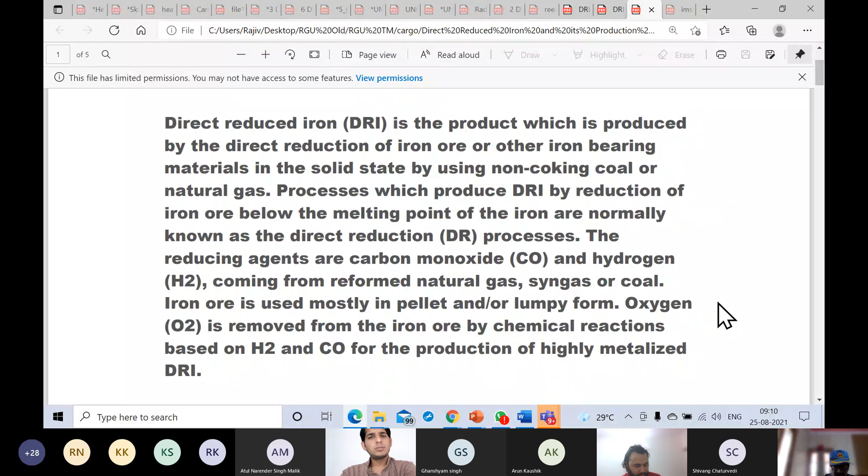So oxygen is removed from the iron ore by chemical reactions, and then you have a production of highly metalized DRI. Direct reduction process is there. Solid metallic iron, Fe, the chemical symbol, is obtained directly from solid iron ore without subjecting the ore to metal or the metal to fusion. So it is not melted. It is done by a direct reduction process without melting the product, melting the iron itself.

So in the solid state when reduction is happening, it is to remove the oxygen and allow reduction of iron oxides also. Some other oxides may be present apart from iron ore. You may have MnO, magnesium oxide, silicon oxide, etc. All this are refined, I can use the word refined because we are interested in the end product, which is reduced iron ore. So all these have got iron oxides which are reduced, or oxygen is removed from them, and that is why it is called reduction process.

But they are done at a low thermodynamic activity below the melting point, so they are not fused. It is done in the solid state itself.

Just as a background, I thought you may be interested in how DRI is formed. Now, DRI is porous by structure because oxygen has been removed from it, so it will leave some gaps inside the structure of the iron, and that will cause porous structure.

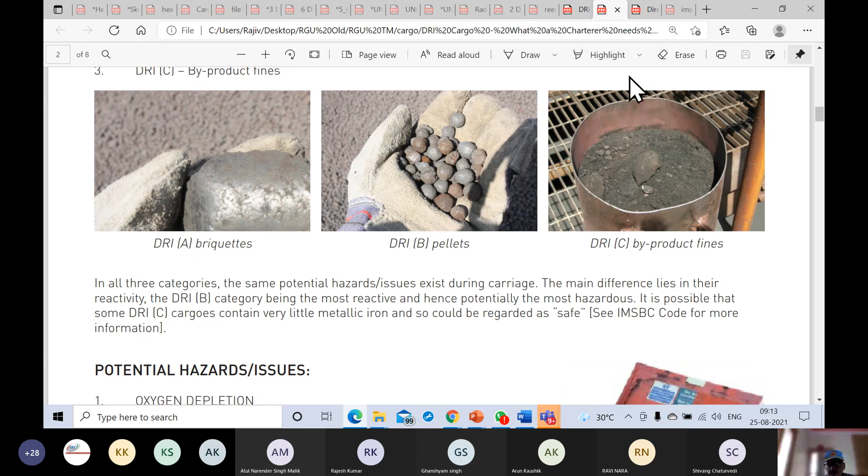Okay, go back. So what is happening is that the metallic form of the iron which is being reduced contains two elements or two metallic forms. One is iron and the other one is Fe with oxygen, iron with oxygen. So this residual form of iron with oxygen is the one of concern, to get the oxygen out of it using chemical reactions. The total iron is a sum of these two.

So the conversion of iron oxides into metallic iron, using maybe carbon as cementite or oxygen removal, is the process of reduction of iron to form DRI, which can be in pellets, solid lumps, or maybe fine byproduct like powder.

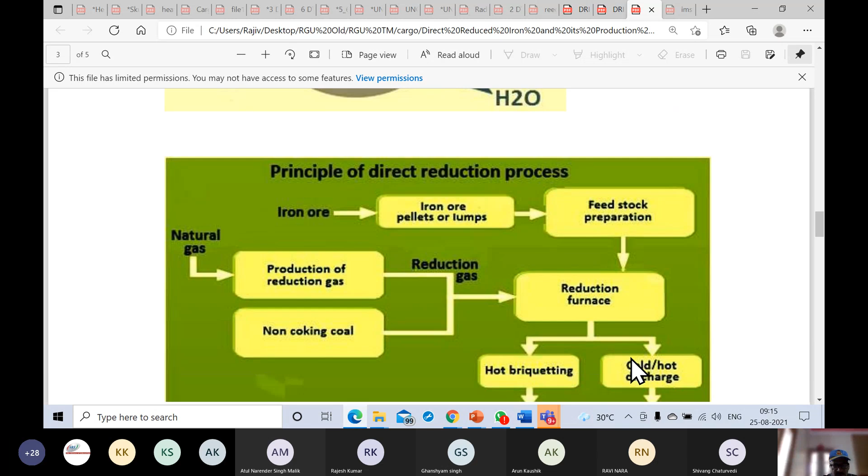This is how it goes. Better is this one. Direct reduction process. This is the flow chart.

Iron ore is being fed like pellets or lumps into the preparation part, or feedstock preparation, or the raw material preparation, if it can be called that. Iron ore in form of pellets or lumps is being fed into the feedstock or the ore preparation. Then it goes to the reduction furnace.

Reduction furnace, you have natural gas coming in, and this is going into the reduction furnace. Natural gas could be, for example, a byproduct from a furnace or from a refinery, and it's being used here to cause this reduction. Also, you can have non-coking coal as a material or element to do this process, either by natural gas or by non-coking coal.

Then this is fed into the reduction furnace. Of course, the reduction furnace will have input from the natural gas, non-coking coal, and also from the raw material, which is called the iron ore, also coming here. Now it is getting reduced, and it leads to production of either hot briquetting or cold/hot discharge. The end result, if hot briquetting, results in HBI, and direct reduced iron is part of cold/hot discharge. You have the end product as a material which has no oxygen, or oxygen has been removed from it. That is why it is called reduced, because the oxygen level has been removed from it.

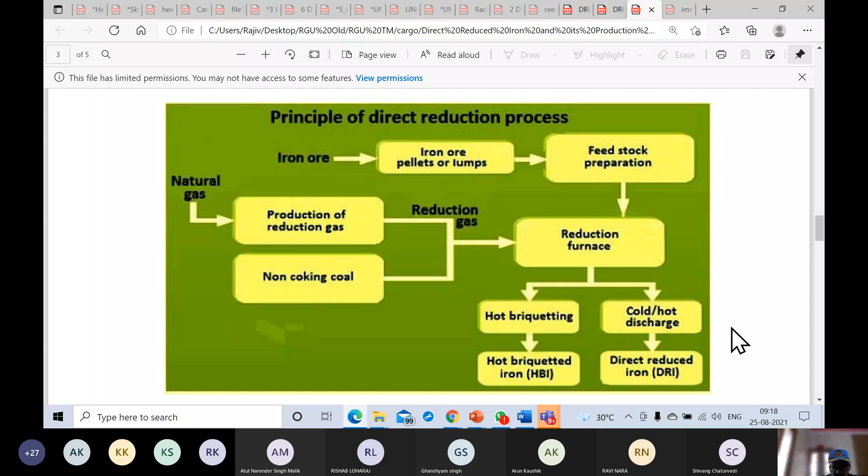So this was just to give you an idea how the DRI is done. Now see, chemical reactions, production, etc. is not really our purview of the subject, but no harm in having a look.

Reduction processes or reactions go like this, a review of 12th standard chemistry. C plus O2 is CO2, CO2 plus C is 2CO, carbon monoxide. 3 Fe2O3 plus CO results in 2 Fe3O4 plus CO2. And of course CO2 you remove, but this goes further on to come back: FeO plus CO. Carbon monoxide has been introduced in the iron oxide for reduction, and the product is iron plus CO2. So oxygen has been removed and this is the direct reduction product.

Now here, this is what is called DRI, directly reduced iron. It is not having any oxygen component. CO2 is released and maybe not used at all, and this is the end product, direct reduced iron without oxygen.

Then of course there will be further cooling done to get the end product cooled down, which may be an external water cooling system. Then the product is discharged from the kiln and screened and magnetically separated. DRI has got a content of iron; this gets magnetically attracted and clings to the separator.

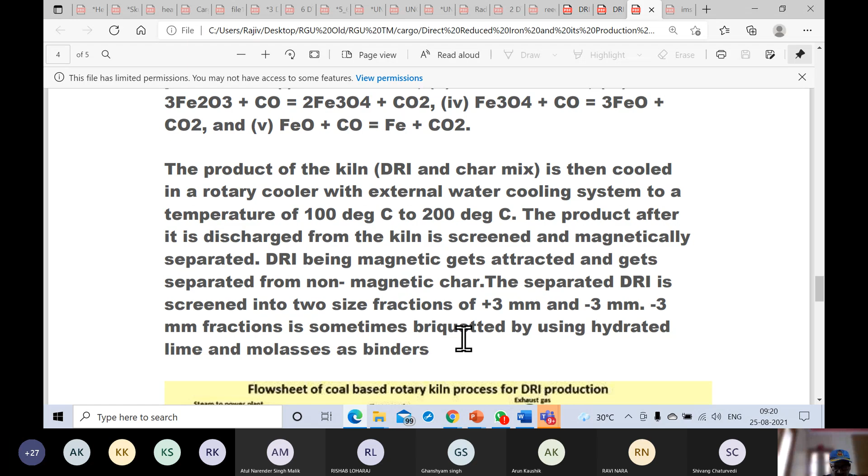Then the separated DRI is screened into two size fractions depending on the requirement and the kiln layout. It may be separated into size fractions, maybe plus 3 mm and minus 3 mm. So these are the products, and you get iron which has no oxygen, called direct reduced iron.

This is something to use coal; not really important, but just remember coal is also used to directly reduce.

Please remember, really speaking, how DRI is produced has never been asked in a paper. But I included this because I felt you might be interested to have a look at how it is done. This has not been a subject of MMD paper or question paper, but I included it only because I thought candidates might be interested to at least get some idea how DRI is made.

As I said, the questions which are going to figure, or have figured, are the precautions and hazards for the product to be carried on board, which we are going to have a look at now. After we finish with this, we move on to the precautions and hazards.

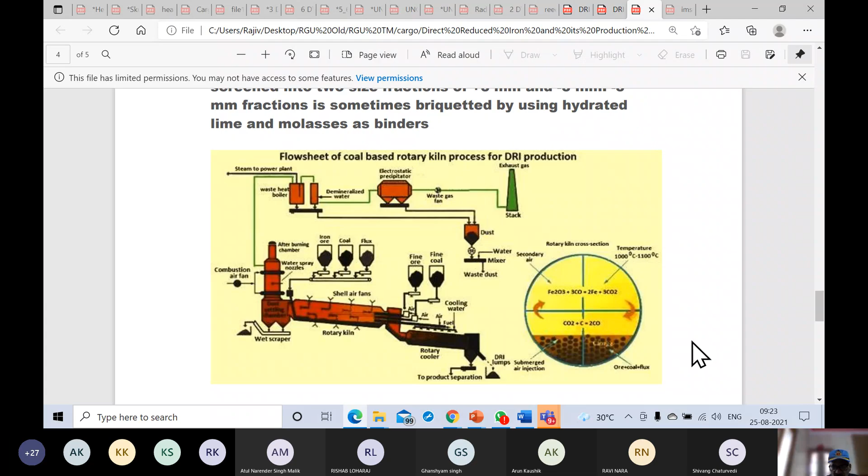So, what is the advantage of DRI to be used? This is used in scrap during steel making, as metallic residuals in scrap. So it is used as a product to be included for steel making. It is a manufactured product of uniform composition, uniform size, and low sulfur and phosphorus content as compared to scrap. This is an advantage if you want to use it for steel production, since it has low sulfur and phosphorus content.

It is possible that it is used in a blast furnace, and then it improves the productivity of the blast furnace.

Okay, so having had a look at the production part, let us move on to the precautions, etc. I think this is where we stopped yesterday. Weather precautions.

One very important factor is that this cargo has to be kept dry. Moisture is not supposed to interact with the cargo at all. Open storage may be acceptable, but if it is to be loaded into ships or transferred between ships, precipitation should be avoided. All non-working hatches of the cargo spaces into which this cargo is loaded are to be kept closed. This is an important point that has to be mentioned in your answer regarding weather precautions for any non-working hatches of the cargo spaces.

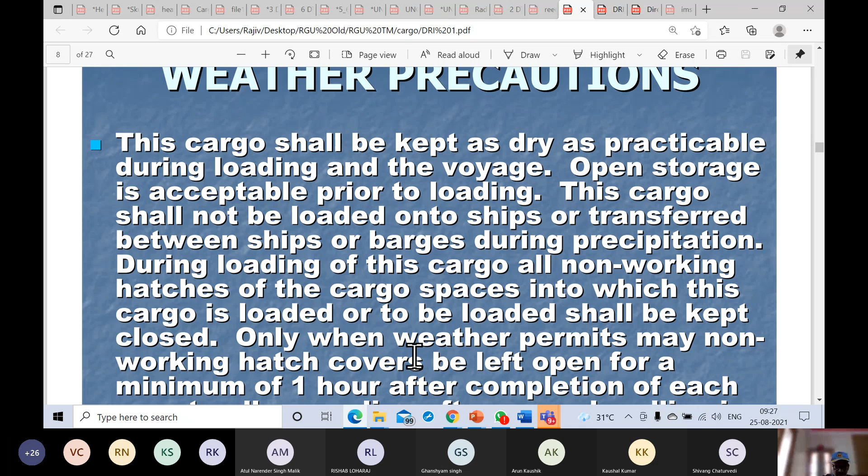So that is one precaution which has to be mentioned in your answer if you are answering the points to be precautions to be exercised while handling DRI cargo - weather precaution.

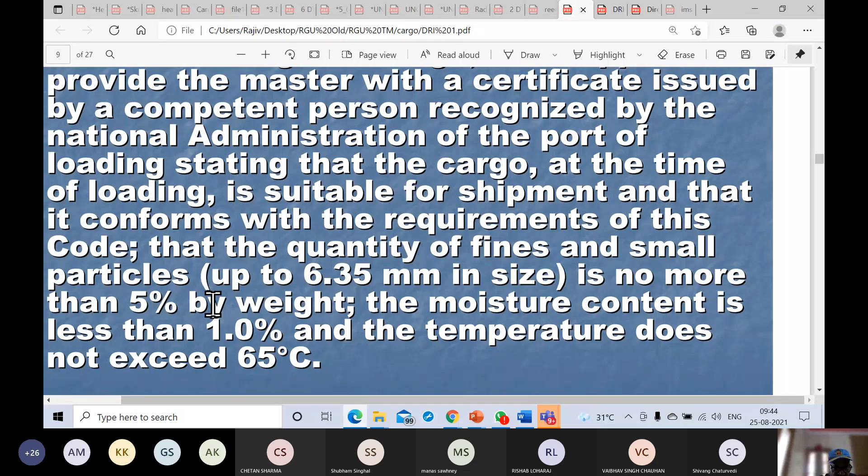तीन चीजें शिपर ने डिक्लेयर करनी है, हमने दो ही देखी है. One, fines and small particles are less than 5% by weight, moisture content is less than 1%, and temperature of the cargo is not exceeding 65 degrees Celsius. ये तीनों चीजें डिक्लेयर होंगी from the shipper. This has to come from the shipper declaration because this causes concern. So, quantity of fines and small particles should not be more than 5%, moisture content should be less than 1%, and temperature of the cargo is not exceeding 65 degrees Celsius. ये तीनों precautions हो गई from MSDS.

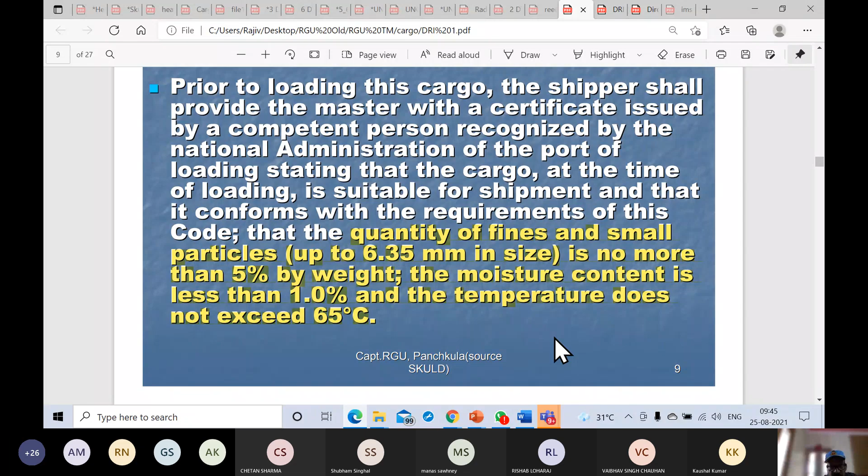ठीक है जी, we go on. Then, to move on, loading. This cargo shall not be loaded when the temperature monitored is in excess of 65 degrees Celsius, which is requirement. If the temperature of the cargo to be loaded is more than this, it cannot be loaded. Or if the moisture content is in excess of 1%, or if the quantity of fines and small particles exceed 5% by weight, then the cargo cannot be loaded.

अच्छा, एक बात बताएं, while we were talking about PSC, let me assure you that if you are loading bulk cargo, especially because we are taking a topic on DRI which is going to be loaded in bulk, then if PSC happens to visit your ship, the first thing they're definitely going to ask you is where is the MSDS? They want to see the MSDS. Let me assure you, if you cannot produce approved MSDS from the shipper, your ship can be detained. Then there is a breach of the PSC. You have to produce a MSDS.

अगर आपके पास नहीं है, you see, I'm giving you a guideline because you're going to be chief officer on any foreign going ship. So if in case you land up on a bulk carrier, and you've never done a bulk carrier, you have worked on tankers only, please remember, if you're loading bulk cargo, you need a MSDS from the shipper. If not, then you have to insist upon it. So much so that on non-production of MSDS from the shipper, you can actually stop loading. Otherwise, just in case PSC inspection शुरू हो जाता है, your ship can be detained.

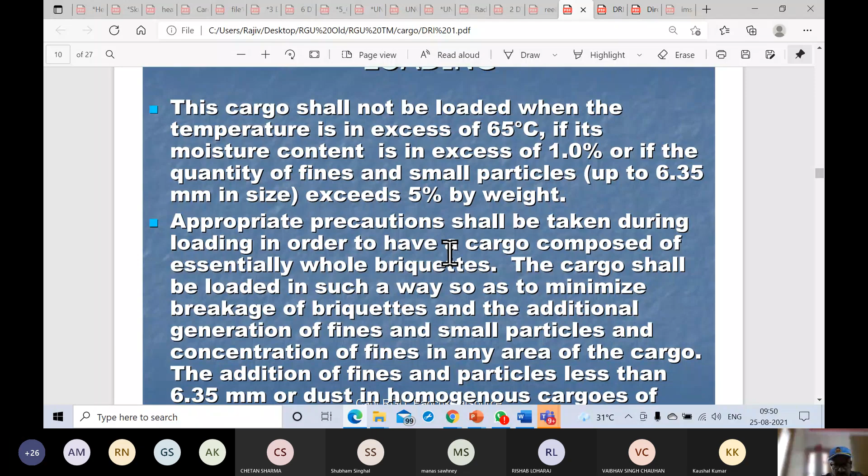Okay, now, so cargo should be composed essentially of whole briquettes, means precaution should be taken. But if it is not that, then it should be loaded in such a way that dropping of the cargo from a height is minimized to avoid breakage of briquettes and generation of additional fines, because fines cannot exceed 5% by weight. So do not drop the cargo is also recommended by MSDS. Do not drop the cargo from a height in such a situation where you can generate fines.

It is prohibited. It is prohibited to generate dust and fines, particles which are less than 6.35 mm. So briquettes should be carefully loaded, dropped into the cargo space so that additional generation of fines and particles does not take place.

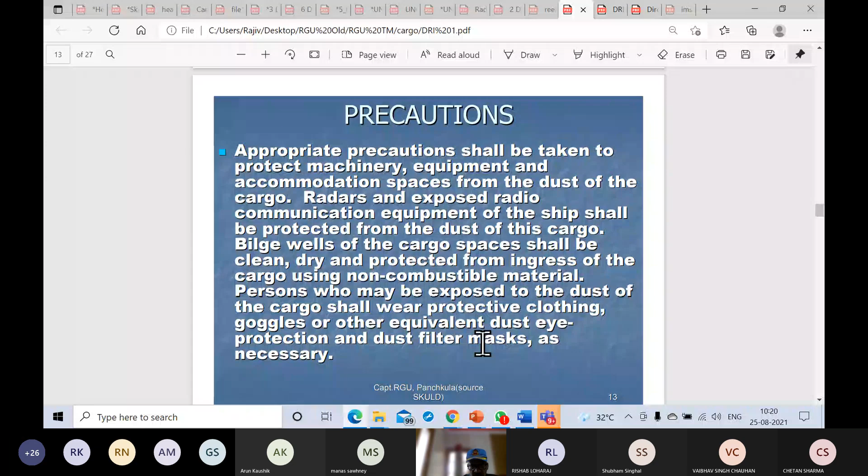No smoking, of course, is a very important point because this cargo can emit hydrogen, which is explosive. The cargo is non-explosive, but the emission of hydrogen makes it dangerous.

Now, because the cargo has undergone reduction caused by removal of oxygen from it, as we discussed yesterday, it has an affinity for oxygen. It has a tendency to absorb oxygen. The cargo will absorb oxygen, but it will make the cargo space oxygen depleted, with a lesser concentration of oxygen in the space. That makes it dangerous: an oxygen depletion zone.

And of course, hydrogen as a flammable gas can build up. This is another concern. So precautions have to be taken before entering cargo and adjacent spaces. As you are well aware, any cargo space by IMO guideline is to be treated as an enclosed space. So all guidelines, your own checklist, SMS checklist for enclosed space entry has to be followed. Not only for DRI, for any cargo, but we are looking at DRI because you may have an oxygen depletion zone and you might have a buildup of any flammable gas.

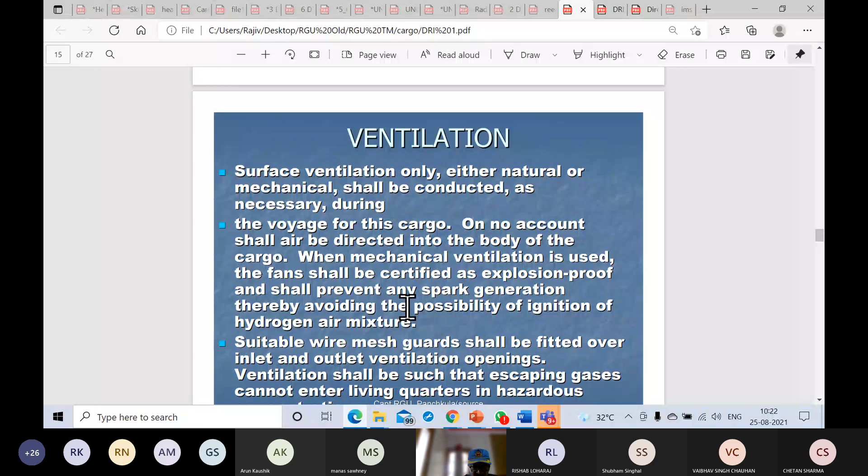Ventilation, only surface ventilation, and this has to be taken care of by not directing air for ventilation directly into the body of the cargo, because that will increase the oxygen supplied, which can give rise to a dangerous situation because the cargo has affinity for oxygen. If mechanical ventilation is being used, then the fans used for mechanical ventilation have to be explosion proof and also prevent any spark generation.

If possible, use suitable wire mesh guards fitted over inlet and outlet ventilation openings. Obviously, ventilation should be carried out in such a manner that the gases escaping should not enter living quarters. Hydrogen concentration should be measured during the carriage by using detectors.

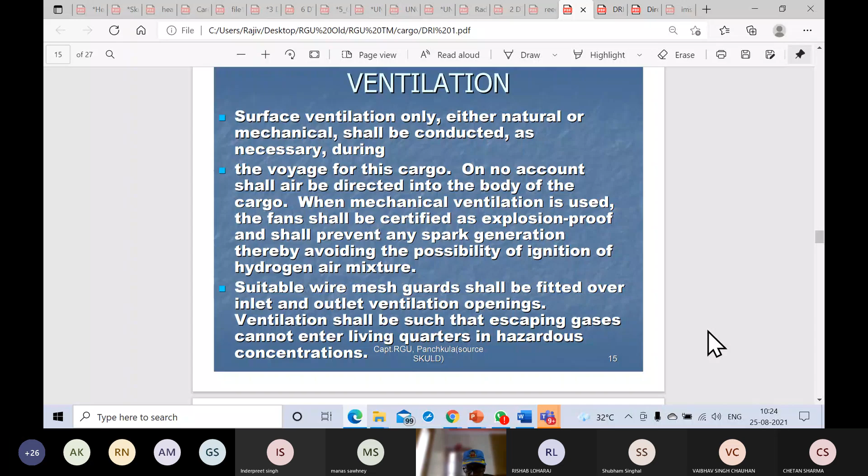You should have a hydrogen measuring detector on board while you're carrying DRI. This detector should be available, should be part of your store. If not, then you have to order it before you load DRI. The hydrogen measurement should be done. Not only does it have to be done, the record has to be maintained.

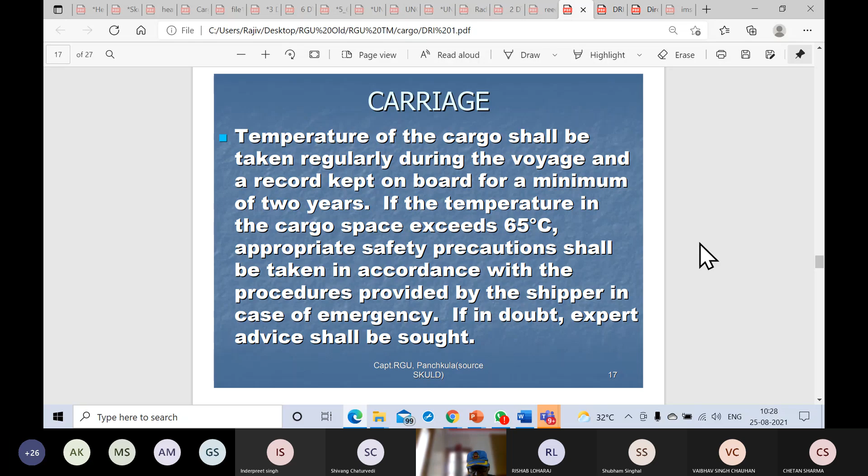Discharge is again the same kind of precautions: cargo spaces not opened immediately and hydrogen concentration measured prior to starting discharge. A fine spray of water may be used to control dust, but only a fine spray, and the spray should not be directed towards the cargo. It is only a spray of fresh water to control dust emission.

Now this fine spray you cannot apply to cargo which is going to be stored in an enclosed space, because it is definitely going to get wet, creating a hazard. So it cannot be applied to any cargo which is going to be discharged and stored in a warehouse or is going to be transshipped. You understand transshipped?

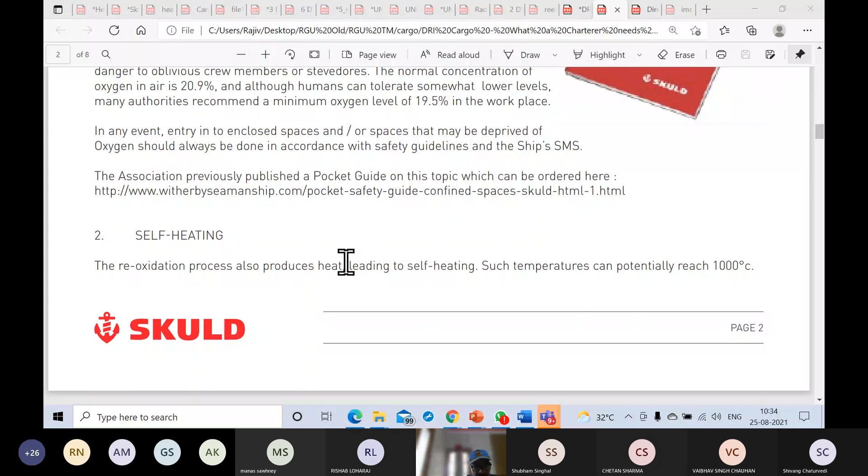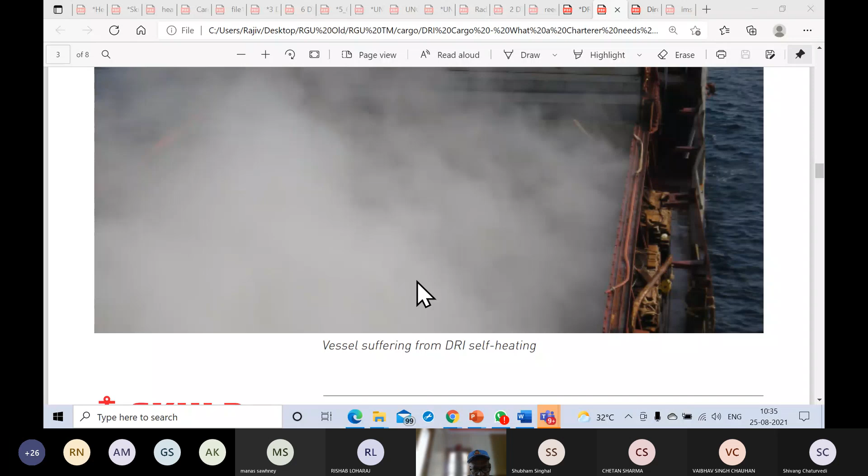Going further, hydrogen is a concern because it is flammable, it can explode.

And, speak, sorry, I did not get you. Say again. Pawan Bharadwaj. Regret, Pawan. Sorry, sir, by mistake. Sorry. Sir, it happened by mistake. Okay. I understand. Okay.

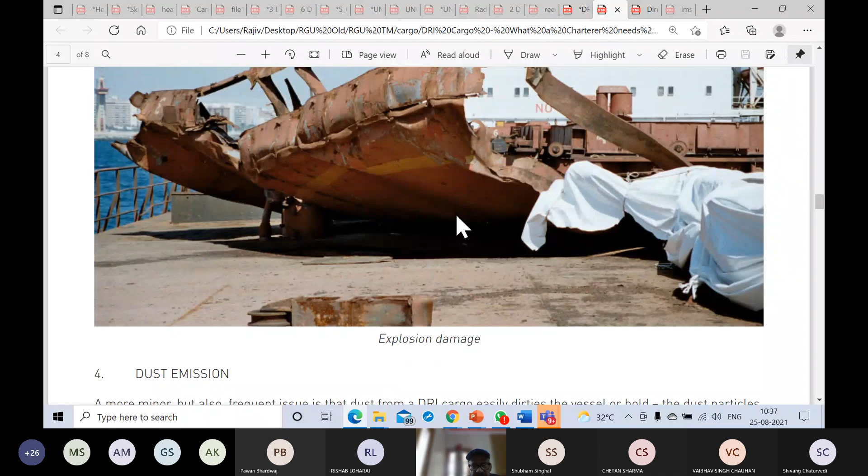So, a lot of us believe bulk cargo, bulk carrier, simple to carry, easy to carry, trade is easy, but really speaking, each bulk cargo has got its own issues which have to be taken care of. No cargo is easy to carry. But of course, it has to be carried. This is what we are paid for, this is what we are employed for. So, we carry it, but with precautions.

Then, of course, another hazard is dust emission. Dust is generated when the cargo is being loaded or discharged. So much so that dust can settle not only on your vessel, which is also a concern, but we have had cases in the past where dust actually settled on another ship close by, ahead of you or astern of you, while you are loading or discharging, giving rise to a claim against your owner.

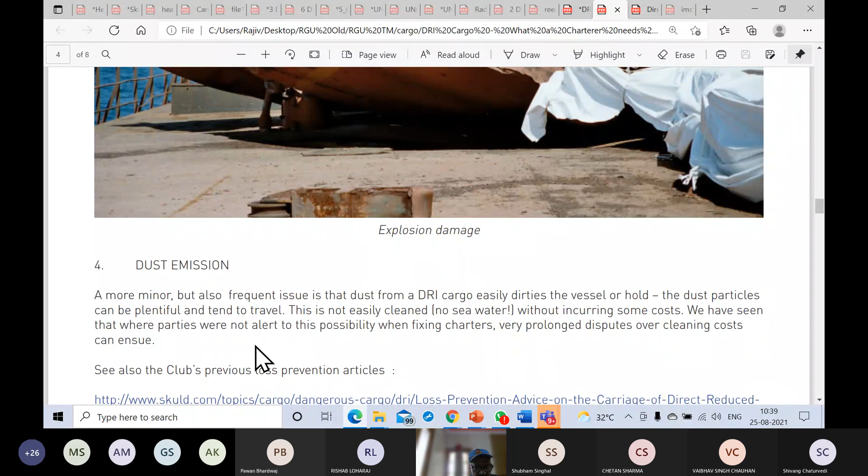This is again a concern which you have to keep in mind. We continue with precautions. There could be a misdeclaration, misconstrued by the shipper for the type of DRI you are loading. It may be done on purpose, it may be done by mistake, but there could be a concern with wrong declaration.

For this purpose it is emphasized that the shipper includes the technical name, not any nickname for the cargo. He should declare it by BCSN. What is BCSN? Bulk cargo shipping name.

Just have a look at this. BCSN is mentioned in the IMSBC code and it is supposed to be provided by the shipper. Technically, it means bulk cargo shipping name, proper shipping name. It cannot be named as a nickname. It should be addressed by the BCSN, the proper technical name for the cargo, so that there is no confusion.

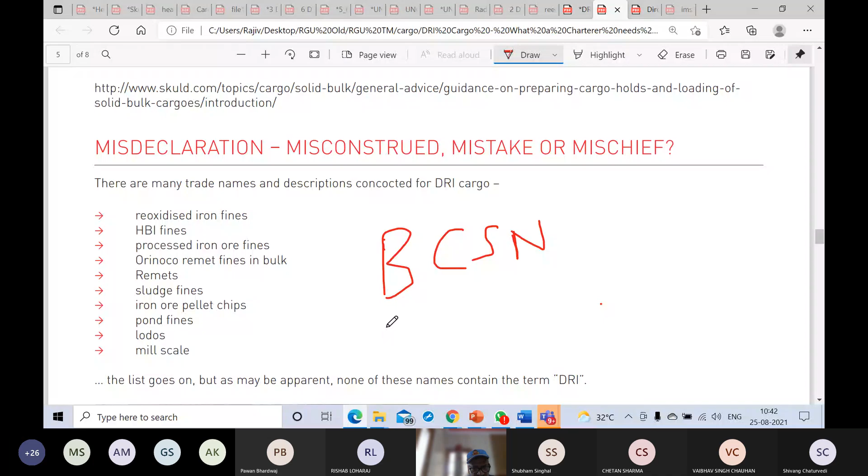Wrong category declaration, DRI-A instead of DRI-C. This could be by ignorance or confusion. This causes concern for us as the transporters of cargo. For them it is just a misdeclaration, but we have to take precaution.

By far, DRI-B is the most reactive. By far, it is the most reactive. By records, it is the most reactive. So you have to be careful for that. Liabilities are always there, even for misdeclared cargo, because the whole thing will surface around the vessel itself.

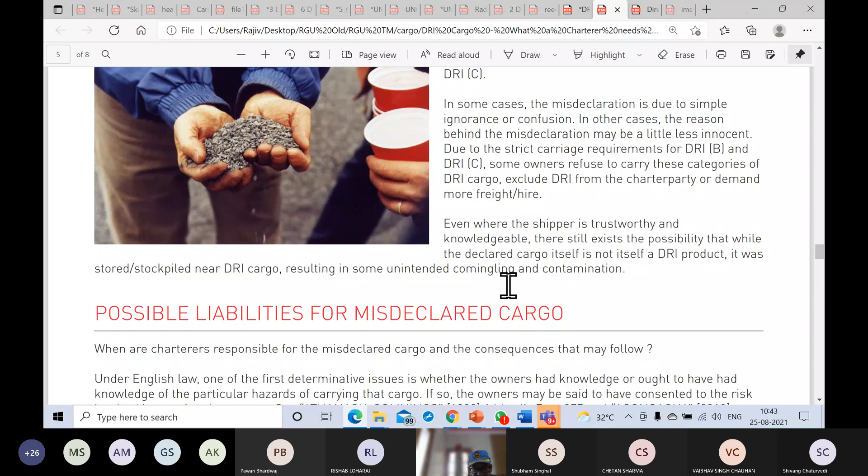So these are some precautions which have to be exercised. Of course, technically, we are not involved with the law part of it, but we have to be involved with the carriage part of it. So MSDS becomes a very important point.

And for trusting the cargo, you have to see who is shipping the cargo. Is he reliable? Is he trustworthy? Again, this will not come from you as mariner, but it will come from your company and your P&I club, because the P&I club is the one responsible for carriage of cargo and any accidents involving cargo. The P&I club is party to it.

So, in case you are having a doubt for anything, you need to contact the local correspondent of your P&I club. This was about BCSN, bulk cargo shipping name. The shipper has to provide you this, not the nickname.

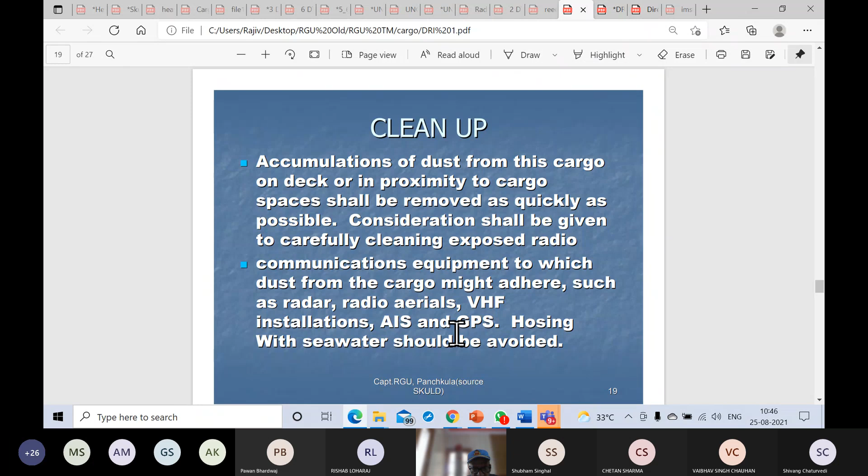So this is what regarding, anyway, we are still on the job regarding DRI precautions etc. Cleanup, of course, is there for making sure that all the things are done correctly and you do not have oxygen depletion, a potential hazard. You may note down one hazard as oxygen depletion. Dust emission is the next one.

Oxygen depletion, we had a look at it. This can be caused because a process has been involved in creation of DRI where oxygen has been removed from the cargo. So the cargo will have an affinity for oxygen and this will absorb the oxygen, causing the oxygen depletion zone.

Please note, direct reduction is a process by which iron content of ore is increased through the removal of oxygen. This is okay, but the potential danger lies in the fact that this is reversible. When DRI comes into contact with oxygen and moisture, reoxidation can take place, and that will cause oxygen depletion.

Just treat the space like the IMO recommendation as an enclosed space, and follow company SMS and checklist for entering any space which has been loaded with this kind of cargo. Treat it like an enclosed space.

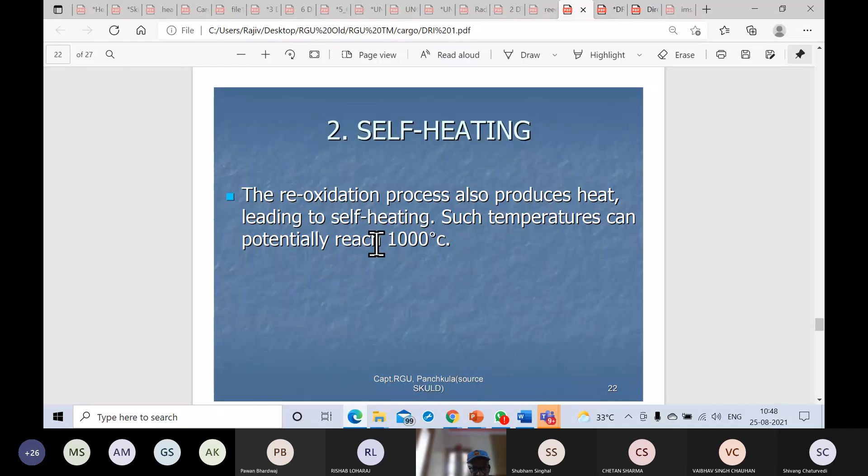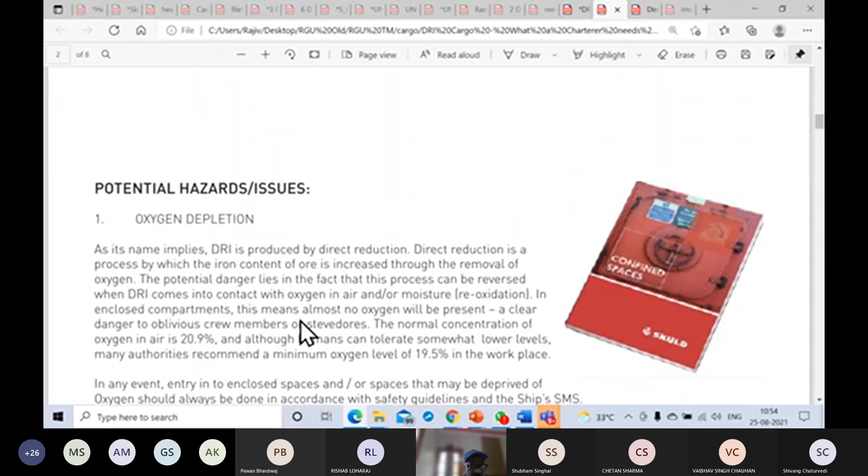So can you note down the potential hazards, like oxygen depletion is 1, just to make a note so you can expand it later on. Or maybe I can put it in a chat box. Potential hazards, oxygen depletion is 1. We have understood it, but just keep it in frame so that you remember it.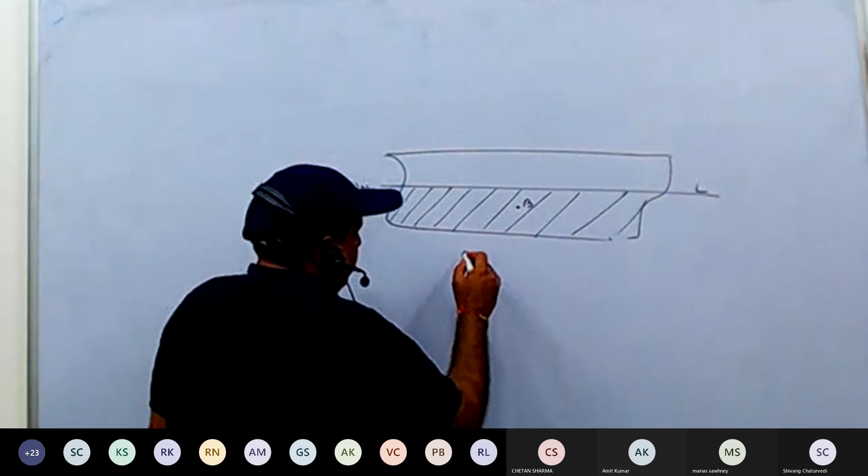अब ये बताओ, ये पानी fresh water हो, sea water हो या dock water हो. अगर ये draft same है, तो will the B shift because of change in density? Yes or no? No, sir. It will not. Right? चाहे अब मान लो, let us give value. Let's say this draft is 7 meters even keel.

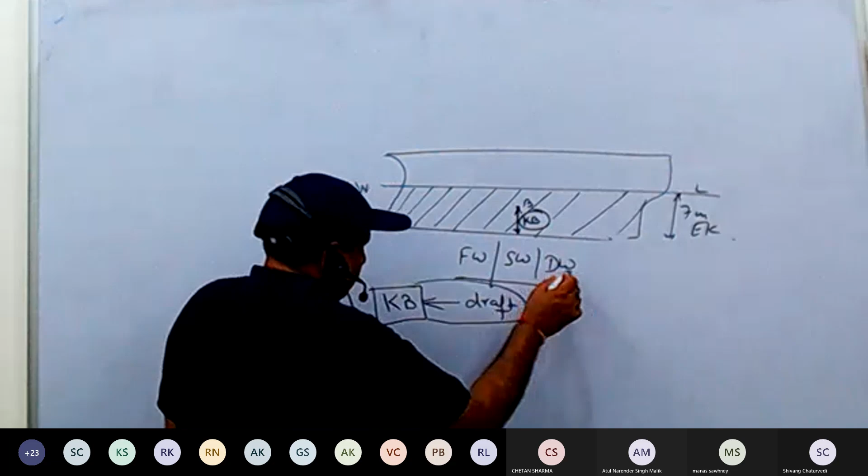So KB is one example of the hydrostatic particulars which will depend only on draft and shall have no bearing on the density of the water in which the vessel is floating. Do you agree? Yes, sir.

So हमारे through these two simple examples जो कि तुम अपनी earlier knowledge के base पर समझ सकते हो, what have I tried to convey? I have tried to convey that hydrostatic particulars can be categorized into two categories: one which is dependent both on the draft as well as density, and the second one which is dependent only on the draft and does not depend on density.

ये particulars हमारे कौन कौन से हैं बेटा? आपके table में अगर आप देखोगे there are 8 hydrostatic particulars. उनमें से I list them. Against draft, if you enter, you have displacement, TPC, MCTC, KB, किसी में VCB भी लिख देंगे, vertical center of buoyancy, so KB, and this is same. Then you will have LCB, LCF, KMT and KML. कितने हो गए? 1 2 3 4 5 6 7 8. ये 8 हमारे hydrostatic particulars हैं.

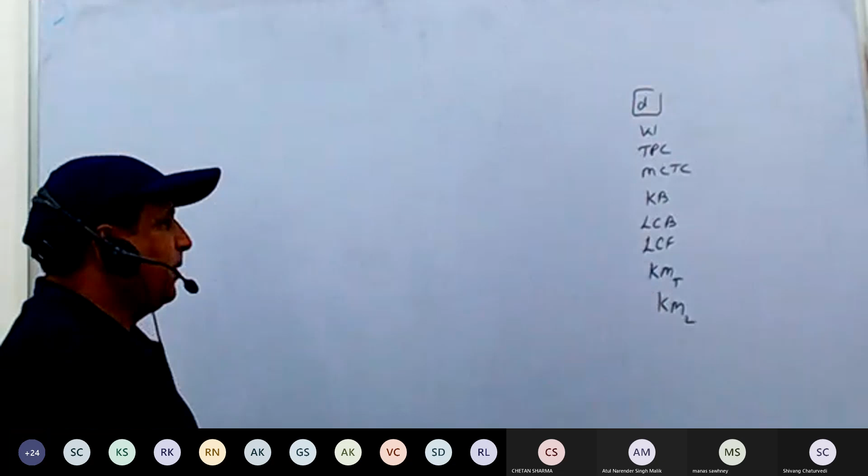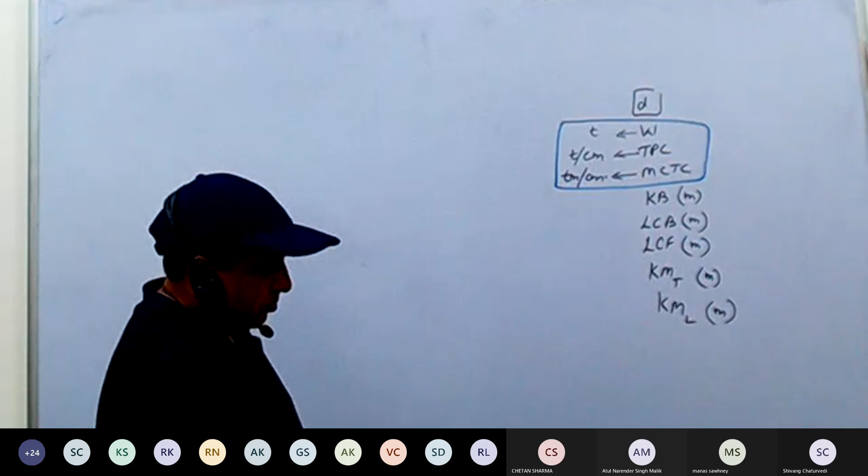TPC by name is tons per centimeter. Moment to change trim, moment will be ton meter and change of 1 centimeter. These will be the units of these 3 particulars. इनमें से जितने particulars में unit में ton आता है, either standalone or in combination, these particulars depend both on density and draft. The remaining particulars whose unit is only meters, they do not depend on density, they only depend on draft. Is this issue clear in the first place, beta?

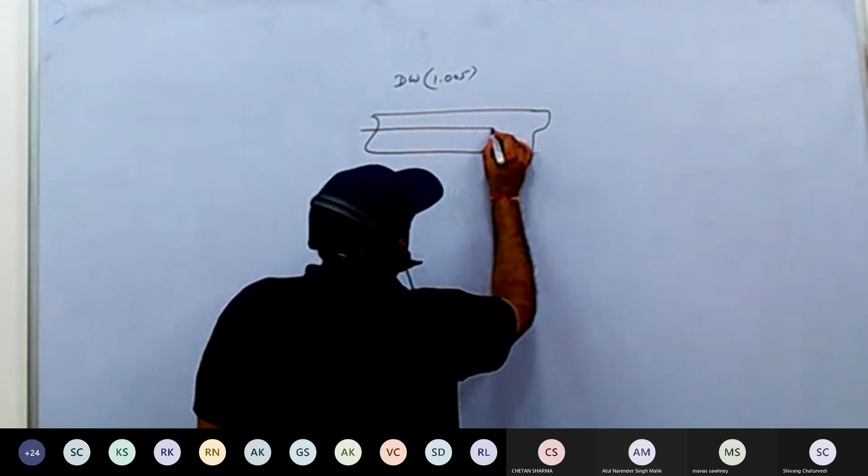Clear? Yes, sir, clear. Okay. Now we come to the issue of how do we get the hydrostatic particulars when draft is given in water of density other than seawater, and when the displacement is given. Let's say dock water of density 1.005. The ship is floating here at 6 meters. मैं सारे even keel condition ले रहा हूँ because mean draft तुम निकाल ही लोगे. Let us say she is floating at draft of 6 meters even keel. That means mean draft is 6 meters.

Now I want her hydrostatic particulars. कौन से particulars चाहिए मुझे? Displacement, TPC, MCTC, KB, LCB, LCF, KML and KMT. अब ये बताओ मेरे को बेटा, मुझे इस जहाज के particulars चाहिए when she is floating at 6 meters in dock water. If the same ship is floating in sea water at a draft of 6 meters,

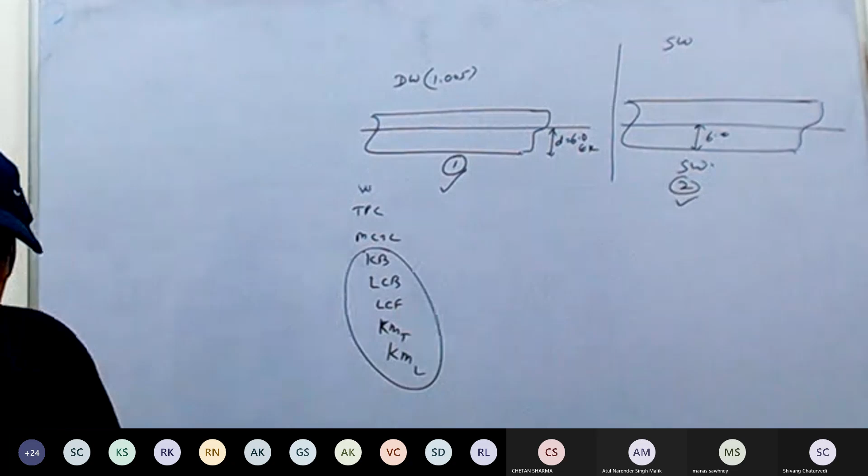With the same draft, I'll enter the hydrostatic tables.

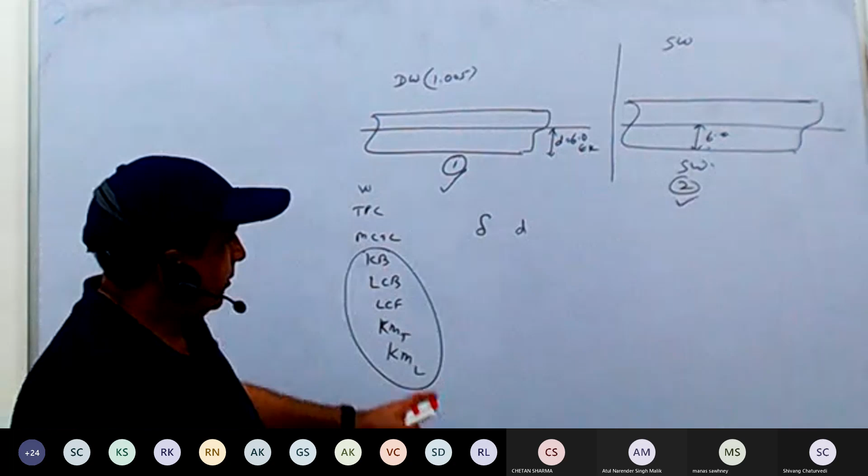TPC, MCTC, KB, LCB, LCF, KMT, and KML. Now, when I enter the tables given to me at 6 meters draft, would the particulars be for seawater, freshwater, or dock water when I'm entering the tables? Come again, sir. So when I enter the hydrostatic tables provided to me at 6 meters draft, the particulars that I shall obtain from the table, which density would they be for? Seawater density. Seawater is 1.025. Correct.

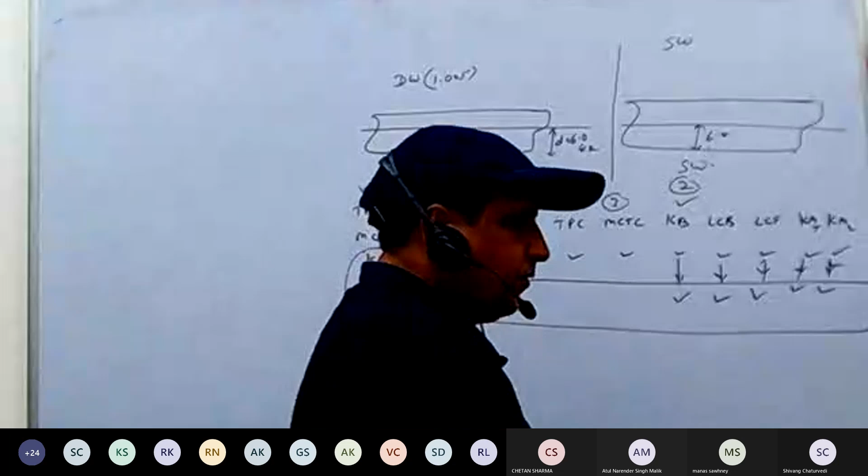Now these 3 particulars, 1, 2, and 3, they will need to be modified for dock water. Why? Because these particulars depend on the density, and I'll just show you how we do it for displacement, and it is the same process for the other 2 also. You just said displacement is equal to underwater volume into density.

So if I take the displacement in seawater, which will be here, displacement in seawater at 6 meters draft will be equal to underwater volume at 6 meters irrespective of density, correct? Yes, sir. Multiplied by density of seawater. Do you agree? This formula gives me this. Yes, sir. So what does this give me?

It gives me underwater volume at 6 meters draft, irrespective of the density of the water, will be equal to displacement in seawater divided by density of seawater, which is 1.025. Yes or no? Yes, sir. So this is the underwater volume which you obtain by doing this. Correct?

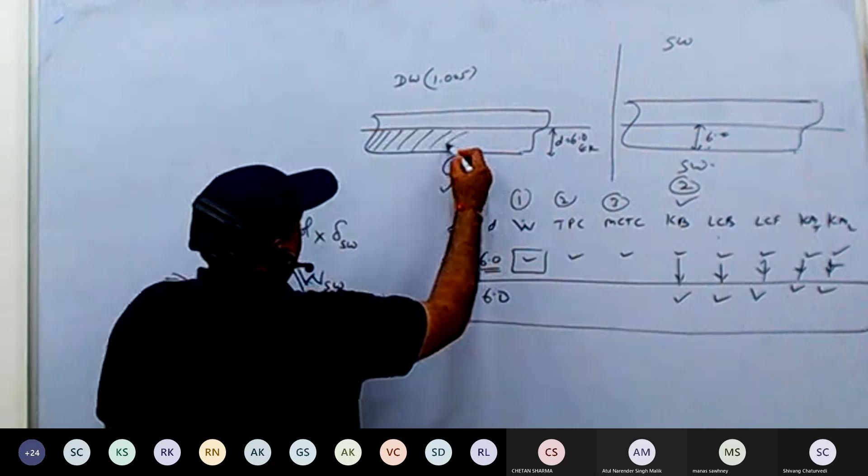Yes, sir. You obtain it actually in seawater, but since it's the same ship floating at the same draft, this underwater volume in seawater will obviously be equal to underwater volume in dock water. Why? Because the drafts are same, right? Yes, sir. Underwater volume will be same. Correct. So what will be the displacement in this case?

In this case, displacement in dock water will be underwater volume at 6 meters in dock water multiplied by density of dock water. Correct? Yes, sir. And what is the underwater volume? Underwater volume is displacement in seawater divided by density of seawater. So if I multiply this with the density of dock water, will I get displacement in dock water at 6 meters? Yes or no?

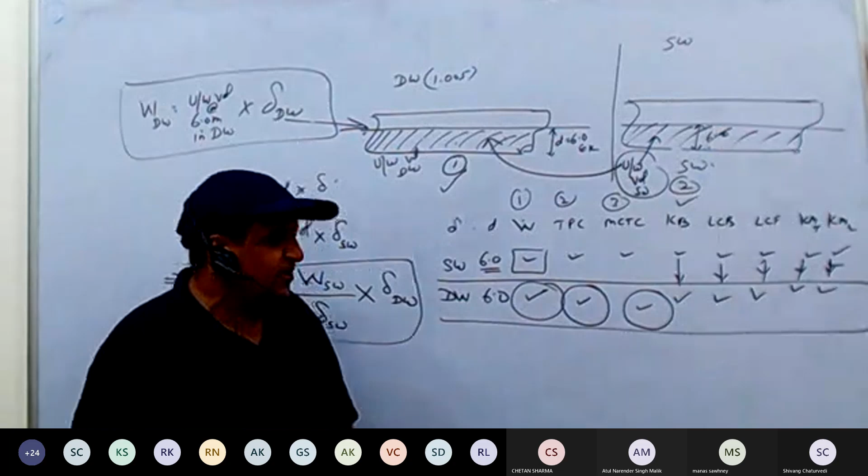Okay beta. So these 3 will be converted, these 5 will not change, but I will repeat them here, and then I would always recommend make a box around it, because these are the particulars which you are interested in solving your question. Correct beta? Yes sir. So now if you are given the vessel floating at a certain draft in water other than sea water, would you be able to fetch the particulars, or you still have any doubts? If you have any doubts, let me know about this issue first.

There can be situations when you are given the displacement of the ship and not the draft, and you need to find the hydrostatic particulars.

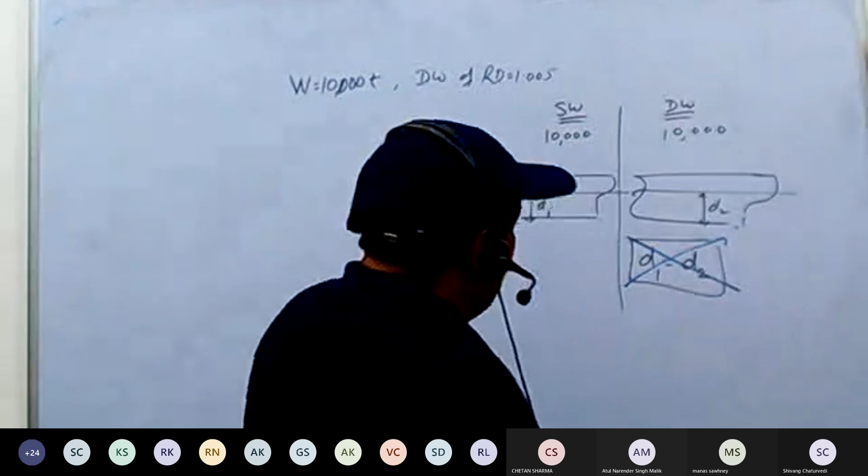Yes, sir. Because the drafts are not same. What do I want to know now? Now I'll rub out this part. Now my ship is in dock water.

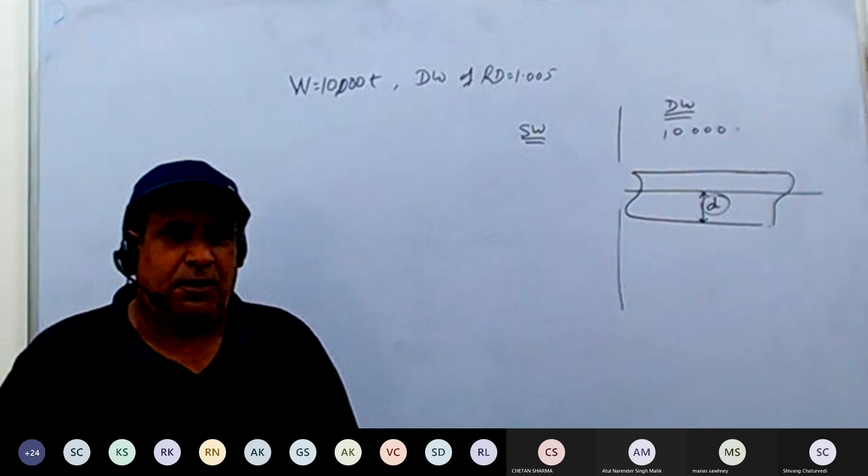Now imagine, with the same draft, if I put this ship imaginarily in sea water - same ship, same draft. My question is, would these two underwater volumes be the same? Yes, same sir, same draft.

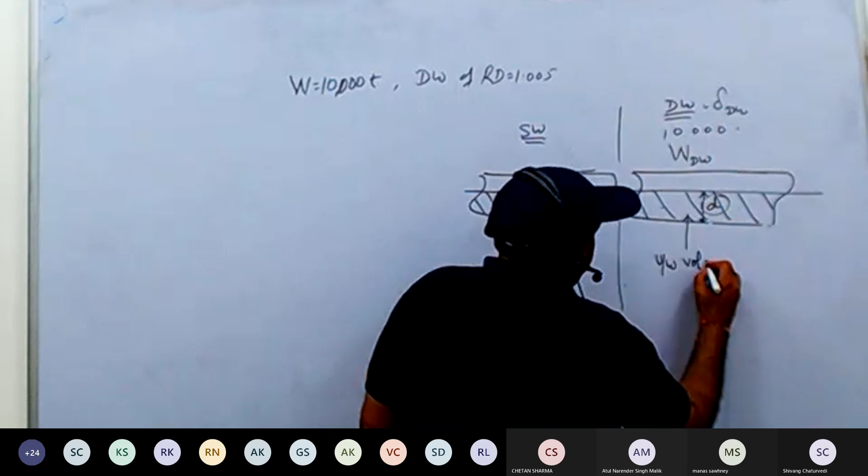Correct. So here I know the displacement in dock water, I know the density of dock water. So the underwater volume of the ship in dock water will be equal to displacement in dock water divided by density of dock water. This will be the underwater volume.

Yes sir, what I imagined, I have put this ship here. Would they have the same displacement also, or different displacements? Sir, different, because the underwater volume is the same, but the densities are different, correct?

Yes sir. So here, what would the displacement be? This underwater volume - what is it equal to? This underwater volume was displacement in dock water upon density of dock water. This is the underwater volume.

And if this is multiplied by density of sea water, would this become the displacement in this condition? Yes or no? Yes sir. Correct. Has the ship actually moved to sea water?

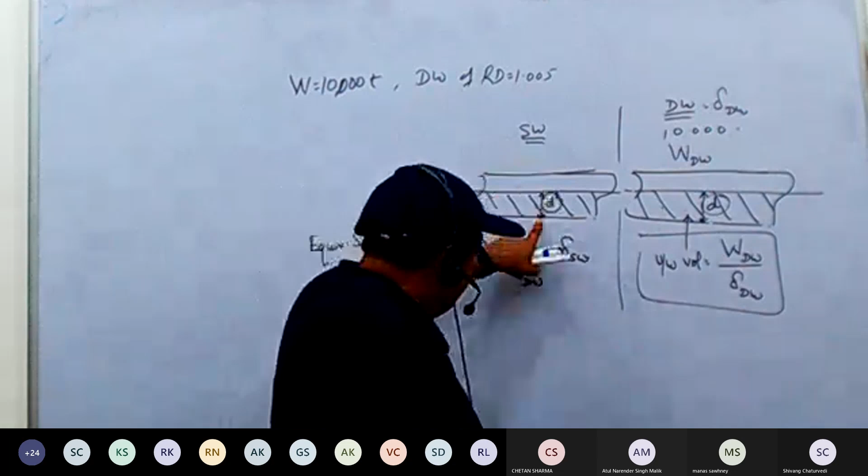What is this equivalent seawater displacement? This equivalent seawater displacement is the displacement with which, if the ship was put in seawater, she would have the same draft as the draft in dock water. That is the equivalent seawater displacement. Have you understood my statement?

That means at this displacement, or any displacement that is equivalent, both vessels will have equal draft. Because that's what you just did, na beta? We have just calculated, used the formula and done it, na? So why should we try to summarize? Tell me, if you're not convinced, let me know. Yes sir, correct.

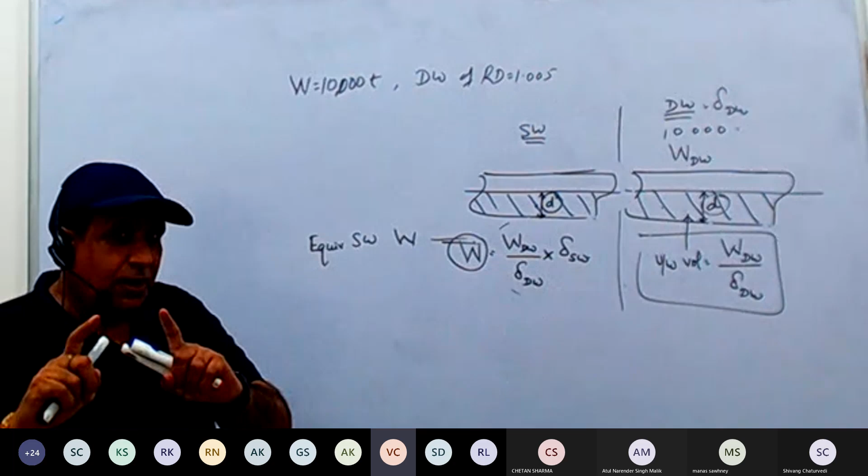So now tell me, the ship's displacement of 10,000 tons in dock water - sorry, the ship's draft at 10,000 tons displacement in dock water - would the draft of the ship be the same if she is in sea water with displacement equal to equivalent sea water displacement? Yes or no? Yes sir, because we keep the underwater volume same, sir.

So that means the draft of this displacement, that is the draft of my ship here, right? Yes sir, right. So that means once I know this displacement, whose draft equals the draft in my case, then once we know the drafts, we can enter the tables, na?

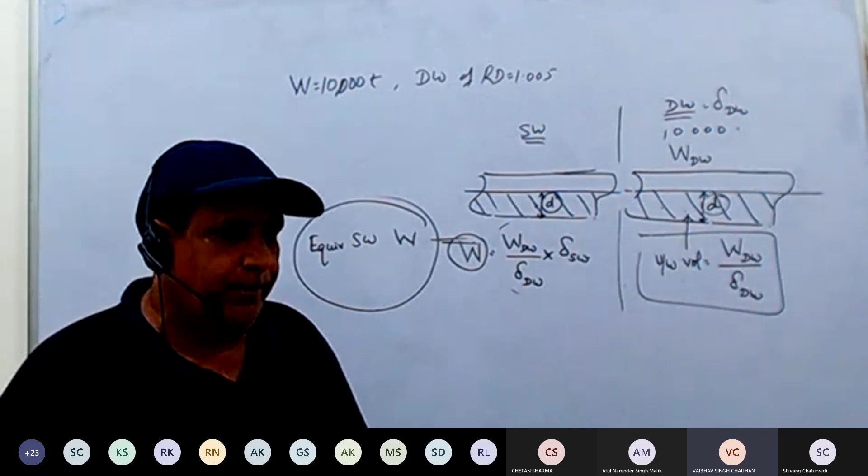Yes sir. So this equivalent sea water displacement we calculated, we have done it only to get the equivalent draft. We have done it to get the same draft as the draft in dock water for the vessel in sea water. If the vessel was in sea water at the same draft, what would be her displacement - that is the equivalent sea water displacement.

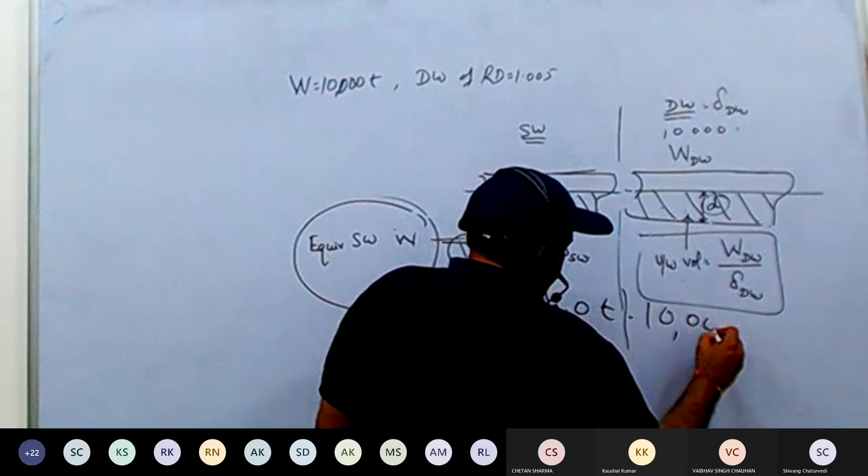10199.0. ठीक है, अब इसका मतलब क्या हुआ? Since you wanted to talk in terms of values, let me tell you - same ship अगर उसकी 10,000 टन डिस्प्लेसमेंट डॉक वाटर में हो या 10,199 डिस्प्लेसमेंट सी वाटर में हो, in both the cases the draft will be same. That is what I was trying to convey, right beta?

Yes sir. जो मेरा शिप है अगर वो डॉक वाटर में, इस डेंसिटी के डॉक वाटर में 10,000 टन्स डिस्प्लेसमेंट पे फ्लोट कर रहा हो, या वही मेरा शिप सी वाटर में 10,199 डिस्प्लेसमेंट के साथ फ्लोट करे, तब दोनों केसेस में ड्राफ्ट बराबर होंगे. यस और नो? Yes sir, draft will be same. तो हमारा मुद्दा क्या था? ये ड्राफ्ट ही पता करना था ना बेटे, बेसिकली.

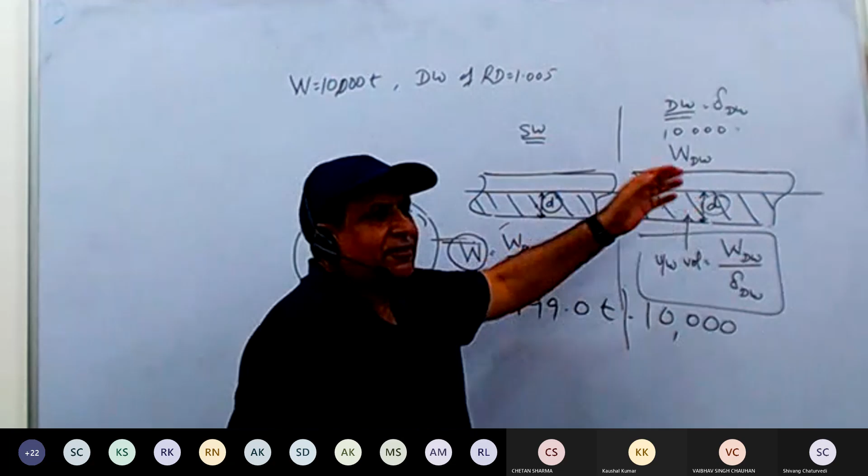हाँ जी सर, करेक्ट. तो इस डिस्प्लेसमेंट के साथ, 10,199 is the displacement in sea water. I can enter the tables with this displacement. Yes sir. उसके अगेंस्ट कुछ ड्राफ्ट मिलेगा? Yes sir मिलेगा, और वही ड्राफ्ट मेरा यहाँ होगा.

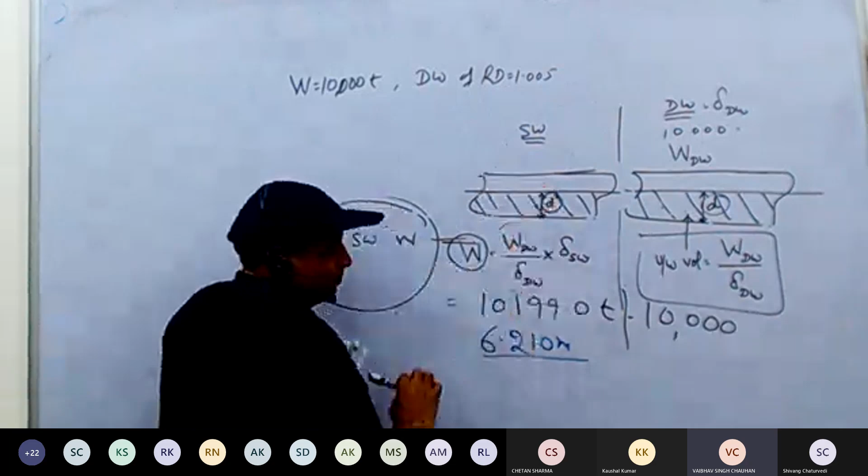अच्छा. Let us say this draft comes 6.210 meter. इसका मतलब the ship is drawing 6.210 meter when displacing 10,199 tons in sea water. The same ship, when displacing 10,000 tons in dock water, would also have the same draft of 6.210 meters. Yes or no? Yes, sir.

Correct. So now you know the draft of the vessel in dock water. Now you can find out whichever particulars you want here. Correct? तो सर जब ये डायरेक्टली आ जाएगा, जैसे 6.210 ड्राफ्ट आ गया डॉक वाटर में, तो इसको अपन पर्टिकुलर्स में एंटर करेंगे, तो जो डिस्प्लेसमेंट है फिर तो बेटा ये पुराना वाला केस हो गया ना जो हमने पहले किया था.

हाँ, तो फिर अपन डब्ल्यू चेंज कर रहे हैं, फिर टीपीसी चेंज. ये तो देखिए, जब 6.210 के साथ तुम हाइड्रोस्टैटिक टेबल में एंटर करोगे तो आपको डिस्प्लेसमेंट तो ये मिलेगी ना. जब इसको तुम चेंज करोगे तो ये वापस तुम्हें 10,000 पे ले आएगा. जब इसको तुम सी वाटर से डिवाइड करके डॉक वाटर से मल्टीप्लाई करोगे तो इट विल गेट यू बैक टू 10,000, which is your actual displacement, right?

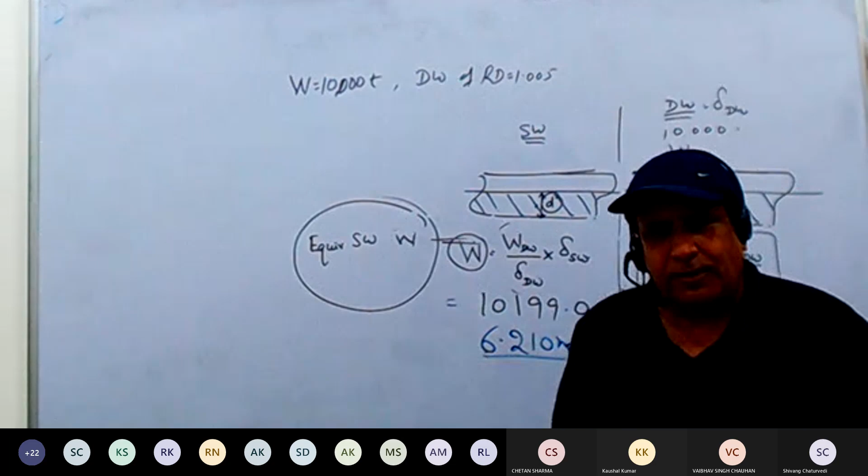सर आपका कहने का मतलब ये है कि अगर ड्राफ्ट दिया हुआ तुम्हारा डॉक वाटर में, तो तुम हाइड्रोस्टैटिक पर्टिकुलर के अंदर घुस जाओ, वहां से डिस्प्लेसमेंट लो और उसको डॉक वाटर में कन्वर्ट करो. This is what we did in the beginning ना? पहले केस में वही तो किया था. हाँ जी. इससे पहले केस में हमने क्या किया था? जो शुरू वहीं से किया था ना बेटा.

तो बेसिकली 6.2 पे हम जो डिस्प्लेसमेंट निकाला है इक्विवेलेंट वही मान, वो तो यही डिस्प्लेसमेंट आएगी ना. आपने डिस्प्लेसमेंट से ड्राफ्ट निकाला, ड्राफ्ट से डिस्प्लेसमेंट यही आएगी ना बेटा, सर सी वाटर में. ठीक है, सर वही सी वाटर आएगी, फिर उसको डॉक वाटर में चेंज कर लेंगे. द मोर यू प्रैक्टिस यू विल नॉट हैव टू चेंज. अगर चेंज भी करोगे तो वैल्यू यही आनी है, अगली बार से तुम चेंज करना बंद कर दोगे.

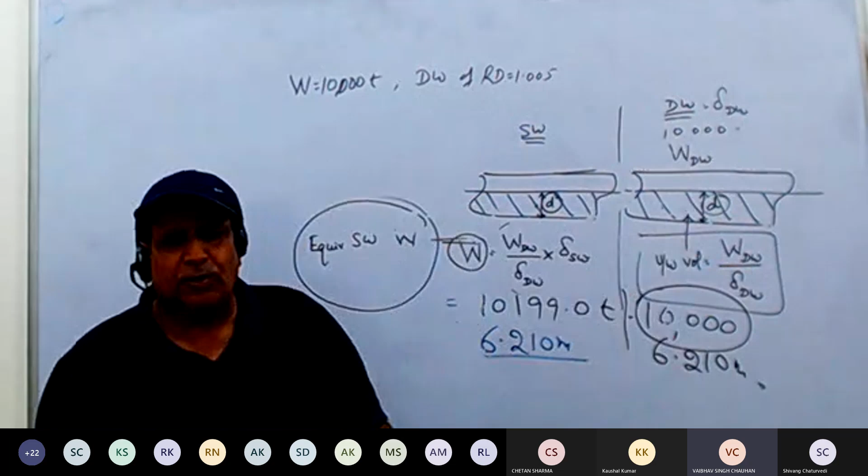अच्छा सर ठीक है. हाँ सर, ये अरे 10199 को 1.025 से डिवाइड करके 1.005 से मल्टीप्लाई करोगे, इट विल गेट यू बैक टू 10,000 ना यार, उल्टा ही तो कर रहे हो, रिवर्स. यस सर. हाउ डिड यू गेट 10199? 10,000 को पहले 1.005 से डिवाइड किया था, फिर 1.025 से मल्टीप्लाई किया था. अब तुम इसको 1.025 से डिवाइड करोगे, 1.005 से मल्टीप्लाई करोगे, इट विल गेट यू बैक टू 10,000. यू विल स्टॉप डूइंग इट, देन यू विल नो कि ये यानी है.

करेक्ट. सर ये जो क्वेश्चन है, प्रीवियस क्वेश्चन का दूसरा तरीका है ना. प्रीवियस क्वेश्चन में हमें सेम ड्राफ्ट पता थे, और इस क्वेश्चन में अब तक हमने ये किया है कि ड्राफ्ट निकाल रहे थे हम. राइट. वंस द ड्राफ्ट इज नोन देन इट टेक्स ऑफ द सेम कोर्स, राइट.

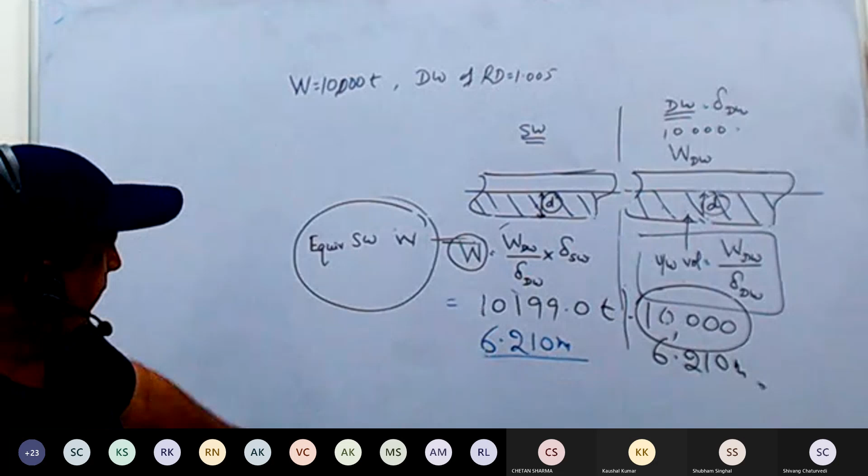यू आर एब्सोल्युटली राइट बेटा, पिछले में हमारे पास ड्राफ्ट था, इसमें जो अब तक हमने ये एडिशनल स्टेप किए हैं वो ये ड्राफ्ट निकालने के लिए किए हैं, राइट. जी सर, पिछले में ड्राफ्ट था और डिस्प्लेसमेंट निकालना था, इसमें डिस्प्लेसमेंट पता है, ड्राफ्ट निकालना है, सेम. करेक्ट. डॉक वाटर सी वाटर में जाके हमने जो उसमें ड्राफ्ट निकाला वही इक्विवेलेंट सी वाटर डिस्प्लेसमेंट निकाली, उससे हमने जो ड्राफ्ट निकाला वही ड्राफ्ट इसका होगा, करेक्ट.

हाँ जी जी सर. सर, इसमें हमने डॉक वाटर से उठा के सीधा सी वाटर में रख दिया, हमने मूव नहीं कराया, मतलब कुछ कंजम्प्शन वगैरह कुछ नहीं है इसमें. कुछ नहीं, ये तो आपने इमेजिन किया कि वहां अगर इस ड्राफ्ट पे फ्लोट कर रहा होता तो डिस्प्लेसमेंट कितनी होती.

आपने सिर्फ ये कहा है कि अगर सेम ड्राफ्ट पे यहां होता तो डिस्प्लेसमेंट कितनी होती, बिकॉज अगर ड्राफ्ट सेम रख रहे हो तो डिस्प्लेसमेंट कैन नॉट बी सेम इन बोथ द वाटर्स, नो? जी सर, करेक्ट. एंड उसका नाम हमने क्या दे दिया, इक्विवेलेंट सी वाटर डिस्प्लेसमेंट, बिकॉज दैट इज नॉट द डिस्प्लेसमेंट ऑफ द शिप. डिस्प्लेसमेंट ऑफ द शिप इज 10,000 टन्स ओनली, राइट. So that we only did to know what is the draft.

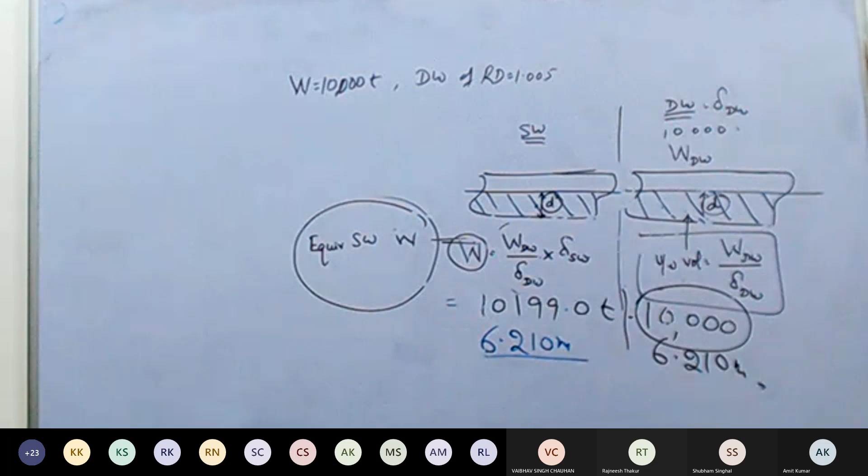Okay, I have just sent you the particulars of one sheet of MV Vijay. Please confirm if you have received it.